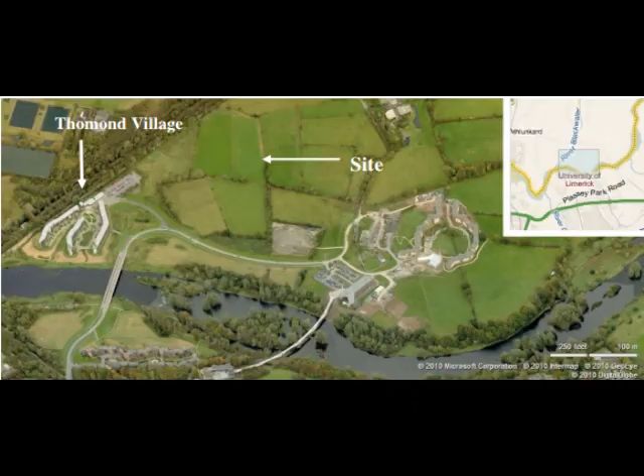Our trigger at week 2 was to design an earth berm to protect Thomond Village from flooding, or to design a detention pond berm to provide the UL campus with a sustainable greywater supply. Our group chose the first option.

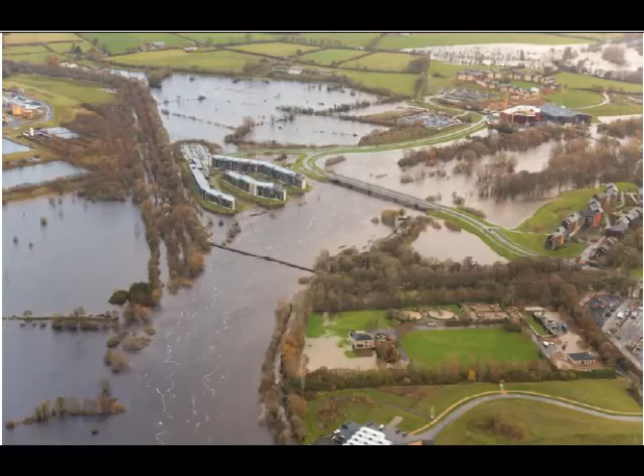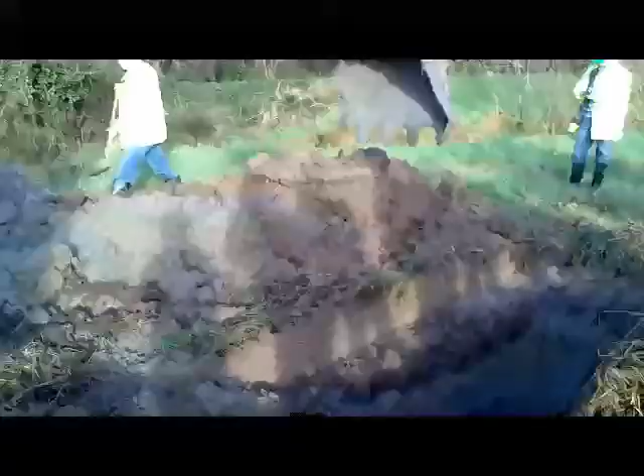From precedent studies, we know that the Thomond Student Village flooded in the year 2009. One of the first things was to conduct a site investigation, which consisted of 2 phases. Phase 1 is information gathering from available records such as maps and published documents, from studying aerial photographs, from site inspection, from company records, and from interviews and contacts.

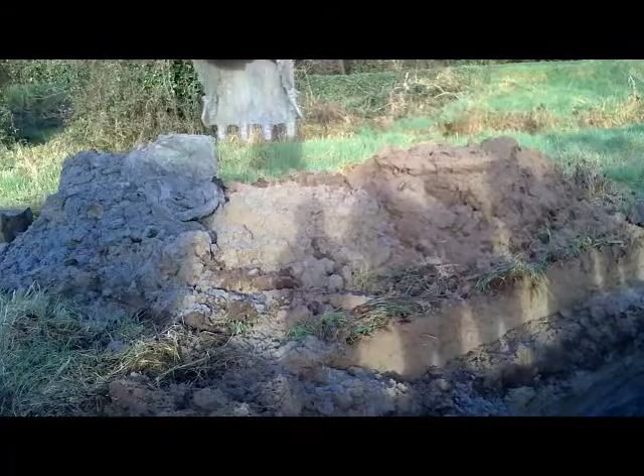Wear a safety hat. The consequence might be walking into the digger, or soil might fall as it's being lifted. Wear a high visibility jacket for visibility to avoid contact with the digger. Stand far away from the trial pit.

Never ever enter a trial pit unless the walls are reinforced due to possible collapse. Stay away from any machinery. Give plenty of clearance.

Contaminants might affect skin, therefore leading to skin irritation. This is prevented by wearing suitable gloves.

A trial pit is an excavation of ground in order to study or sample the composition and structure of the subsurface, usually dug during a site investigation, a soil survey, or a geological survey. Trial pits are dug before construction to determine the geology and the water table of that site.

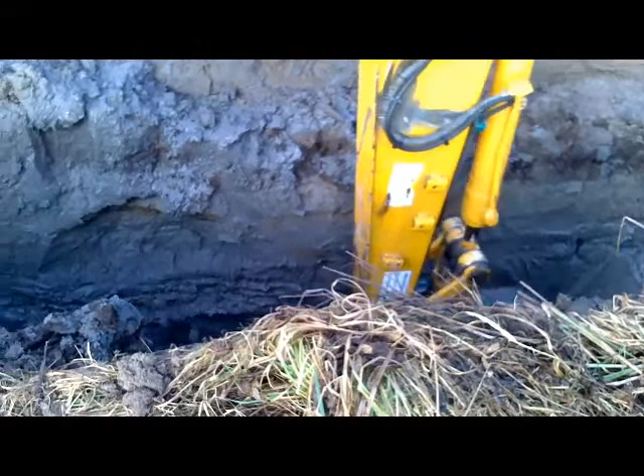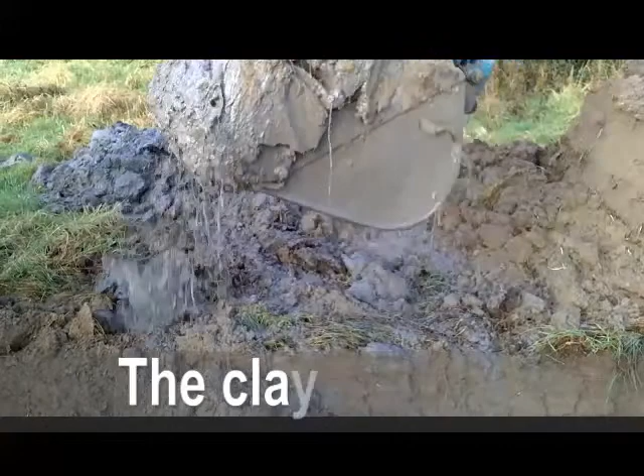Trial pits are usually between 1 and 4 meters deep and are dug either by hand or using a mechanical digger. Building and construction regulations clearly state that any trial pits deeper than 1.2 meters should be secured against structural collapse if they are to be entered by people.

We then will notice a crack occurring at the right hand side before the trial pit begins to collapse.

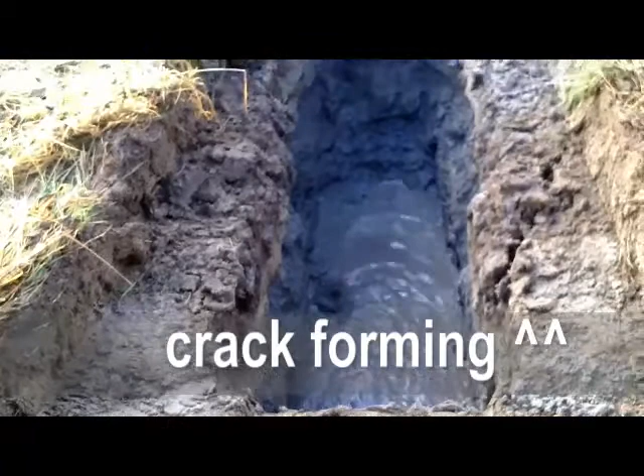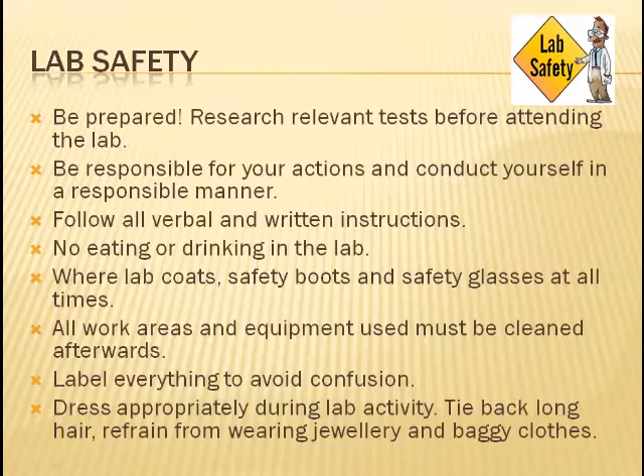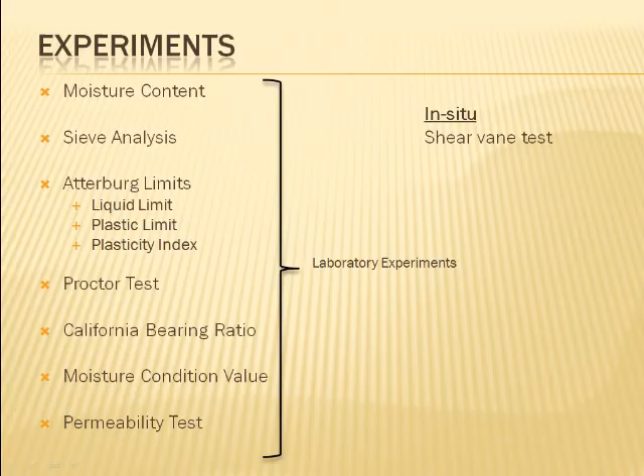Once we had collected samples of soil from our trial pits, we brought them to the soils lab. We carried out experiments on the soil to determine its properties and characteristics. The 2 main types of soil present in the trial pit were tested: a sandy soil and a clay. The following experiments were carried out: shear vane test, moisture content, sieve analysis, Atterberg limits, Proctor test, California bearing ratio, moisture condition value, and falling head permeability test.

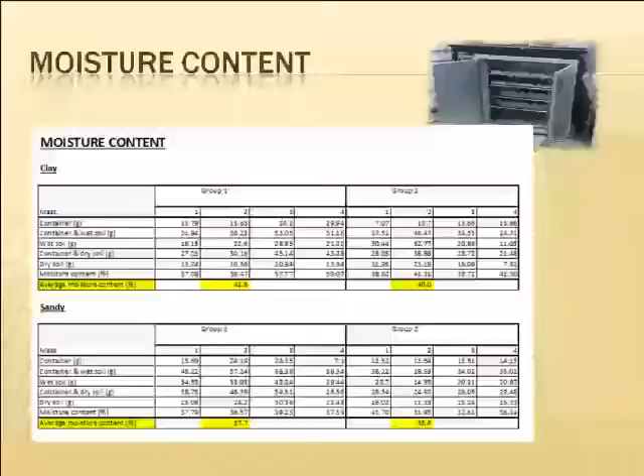The shear vane test was carried out on site to measure the shear strength of the soil, giving an indication of sensitivity. Both undisturbed and disturbed vertical shear strengths were measured and a value of 2 was calculated, indicating that the soil is sensitive. The moisture content of the sandy soil was determined to be between 36 and 38%, and that of the clay was between 40 and 43%.

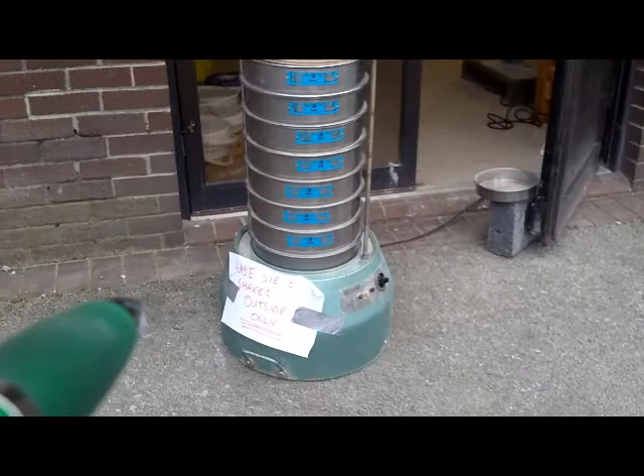Our sieve analysis results were inconclusive, as we ran into a number of difficulties when carrying out these experiments. We did, however, make an engineering judgment that the type of soil used for the following experiments was clay.

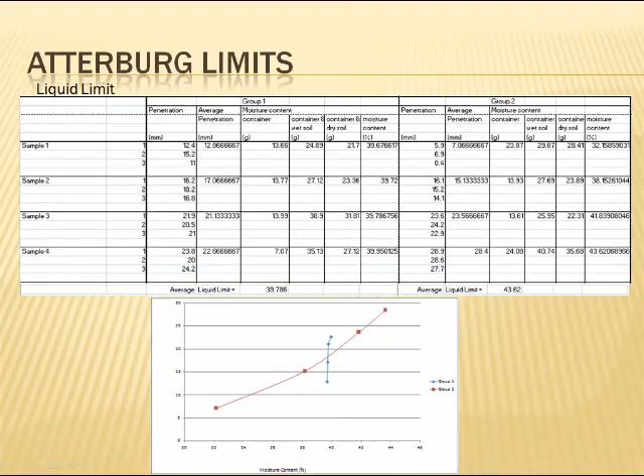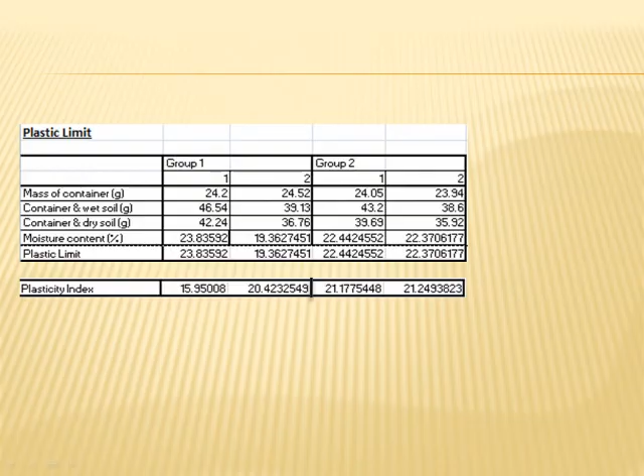The Atterberg limits are a basic measure of the nature of a fine-grained soil. Depending on the water content, the soil may appear in 4 states: solid, semi-solid, plastic, and liquid. Above the liquid limit, the soil flows like a liquid, and below the plastic limit, the soil is brittle and crumbly. The plasticity index can then be calculated from these limits, representing the range of water contents where the soil exhibits plastic properties.

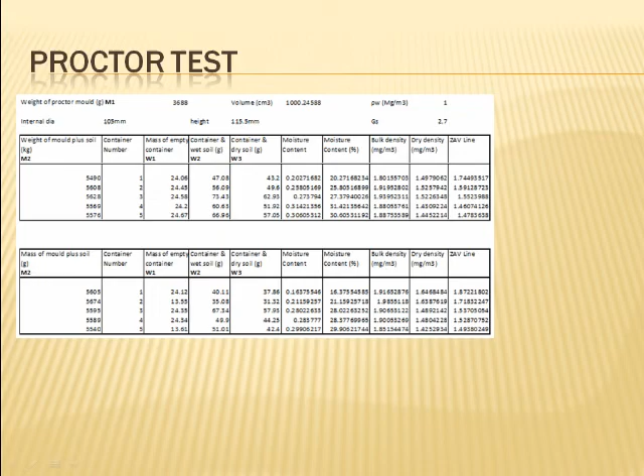The purpose of the Proctor test was to determine at what moisture content the maximum dry density can be achieved for maximum compaction. The zero air voids line was drawn to ensure our results lay below this line. A dry density of 95% will be specified for the berm to allow for a broader range of moisture contents.

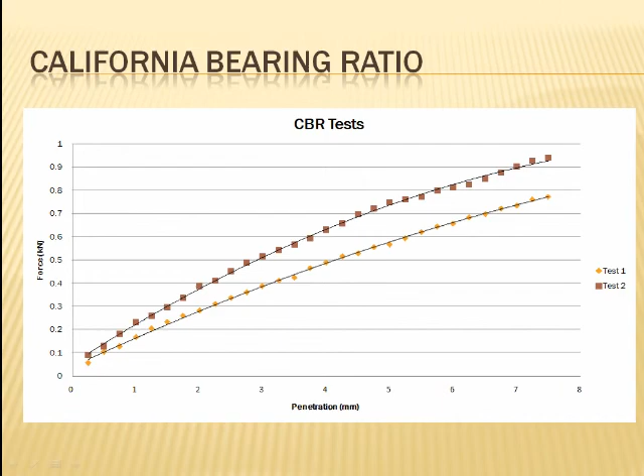The California bearing ratio was performed to calculate the bearing capacity of the soil. This is important to determine whether or not the soil can support the plant that will drive on it during construction, and the weight of the soil from the berm above it.

The moisture condition value is the compactive effort, or number of blows, required to compact a soil to its maximum density using a specific weight rammer.

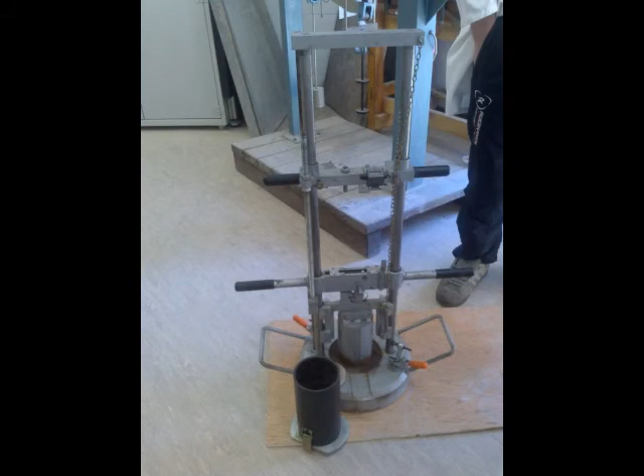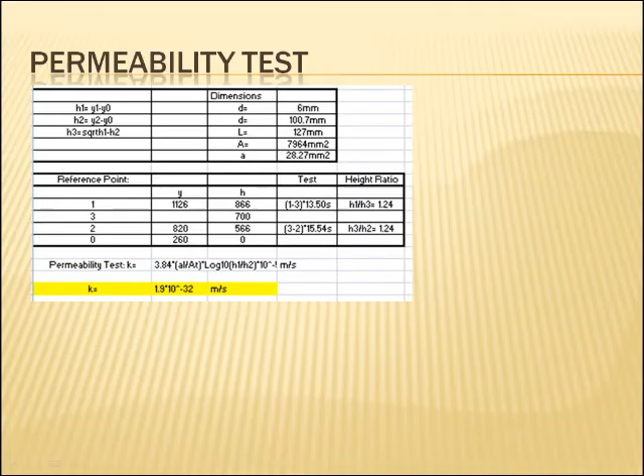The falling head permeability test measures the time it takes water to pass through a specified volume of soil, while the falling head is measured at different heights. From this, the permeability coefficient K can be calculated. This is the basis of our flow net calculations.

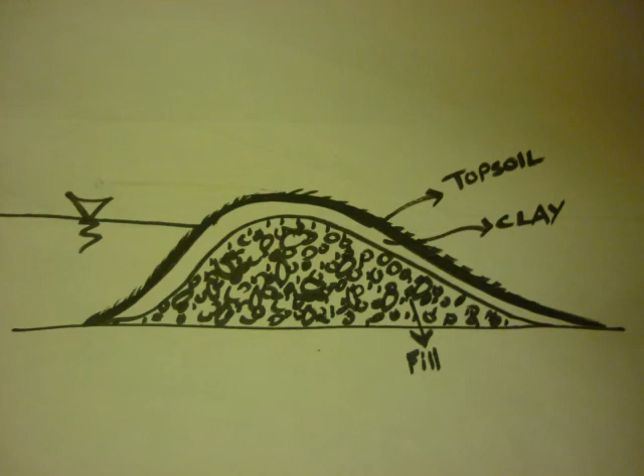Berm design. When looking at the design of a berm, there are many different variations depending on its purpose. In our initial design, we looked at a landscape type design, which we quickly realized would not work for the purpose we intended. This was because these types of earth berms, nicknamed town and garden dams, are relatively low and consist of a well-draining granular core to allow for drainage of water.

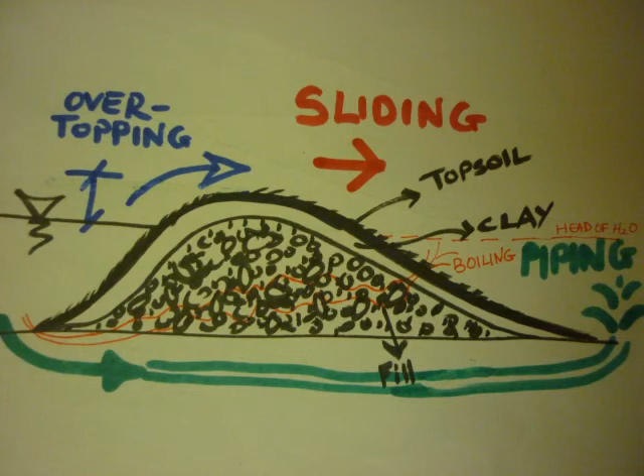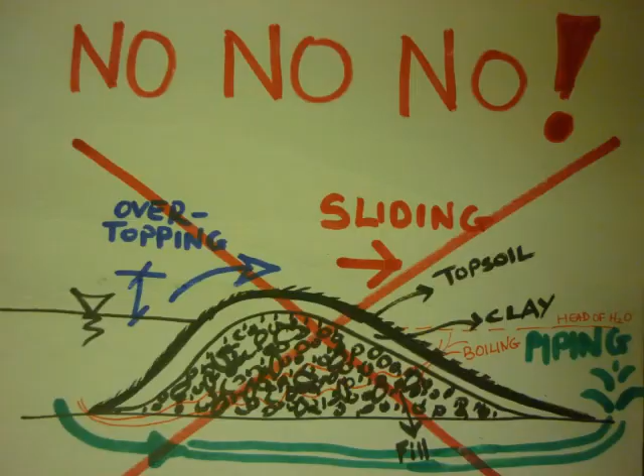This is the complete opposite of what we are trying to achieve. The purpose of our berm is to control the movement of water and protect Thomond Village from rising water levels and potential flooding. Therefore, we are trying to resist and control the infiltration of water. This led us to our next design.

This type of berm is controlled by a well-compacted, high-density clay core and steeper slopes. The core is surrounded by a semi-permeable sandy clay, which allows for the limited passage of water through the berm. In a well-constructed berm, this soil will resist slumping when wet.

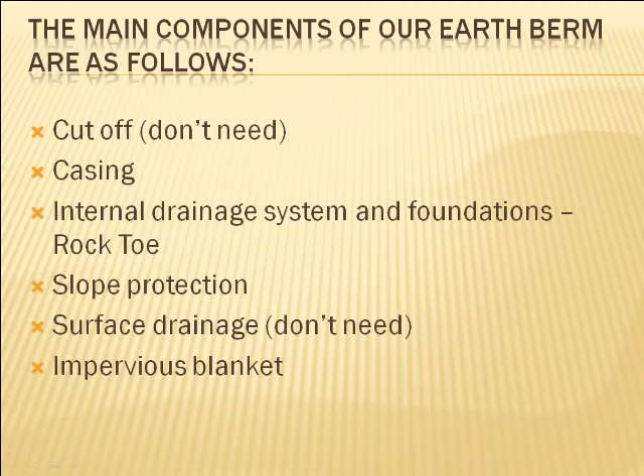We also included a downstream rock toe to handle the seepage in the berm, which could potentially weaken the structure. Its principal function is to provide drainage and also to protect the downstream slope of the berm against tailwater erosion.

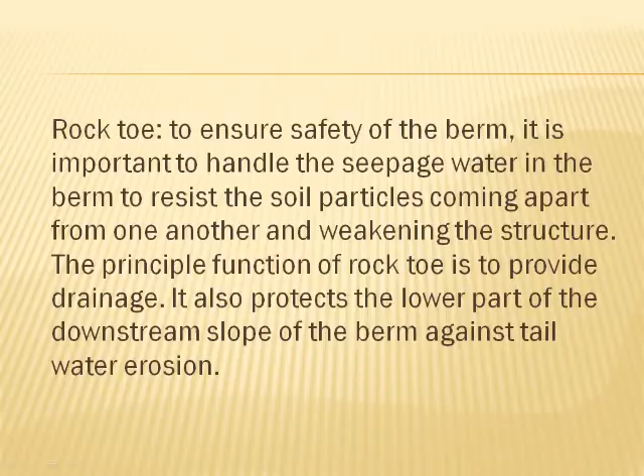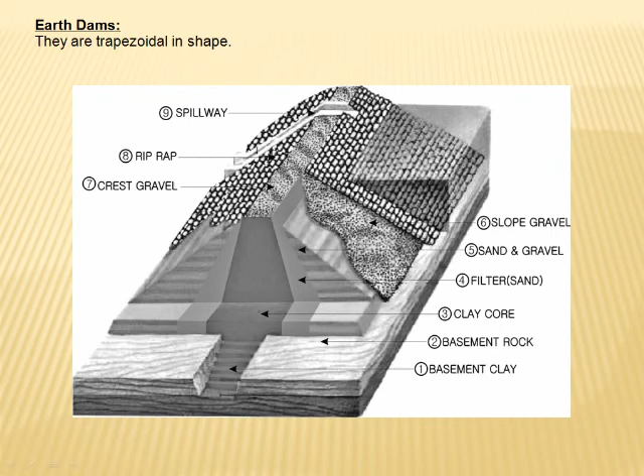After giving our design more thought and considering our options, we concluded that this type of design was far more complex than required for our purpose. In large-scale projects, the supply of available clay is limited, so it is practical to use a clay core.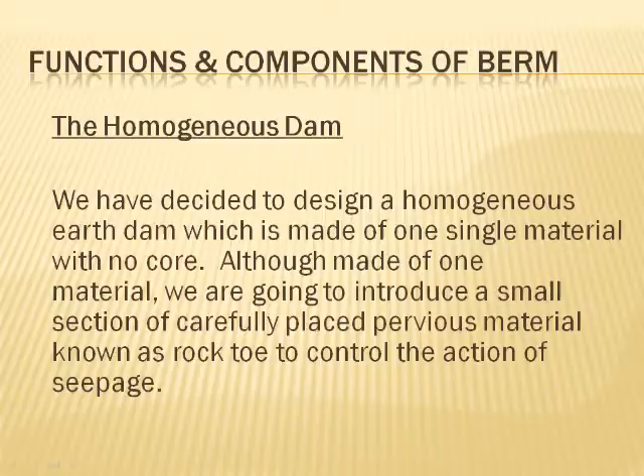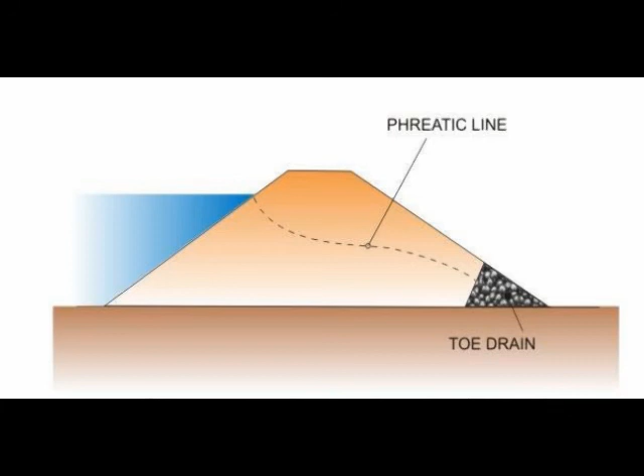Because our proposed dam is on a smaller scale, it is okay for us to use all clay in the design. This type of design is called the homogeneous dam, and this is what we used for our final design. It is made entirely of a single impervious material, high-density clay, with no core.

In addition, we introduced a small section of rock toe, a pervious material on the bottom of the downstream slope to control seepage, as well as a sand and gravel filter. To construct our dam, the upper layer of coarse-grained soil shall be removed, and the berm shall be constructed on top of the existing clay. It is then constructed by rolling or otherwise compacting layers of the selected soil in succession.

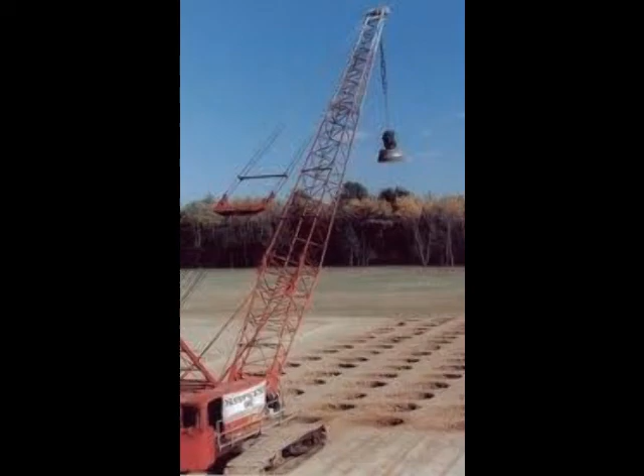Initially, the compaction process squeezes out the air, but as the height builds up, the lower layers experience an increase in pore pressure, which slowly dissipates over time.

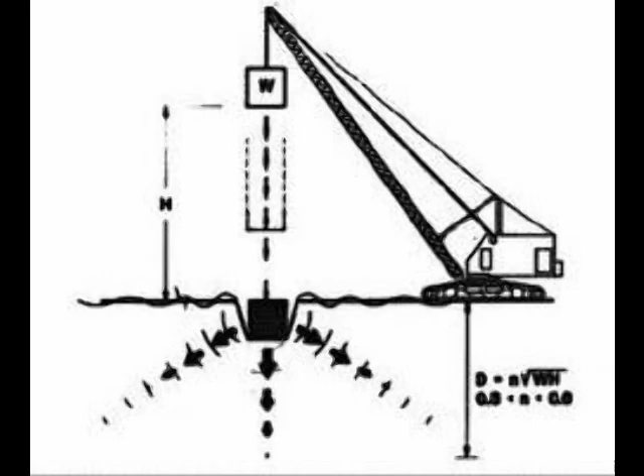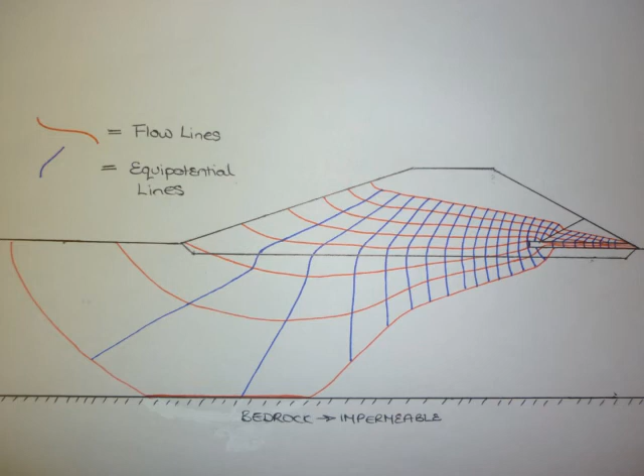Now let's look at seepage. The solution of a practical seepage problem is represented by flow lines and equipotential lines, which make up a flow net. This is done by letting a flow line equal a streamline.

The fundamental conditions to be satisfied in a flow net are that every intersection between flow lines and equipotential lines must be at right angles to each other. Therefore, the flow lines and equipotential lines form curvilinear squares throughout the flow net. It is important to remember that flow in soils is slow and assumed to be laminar.

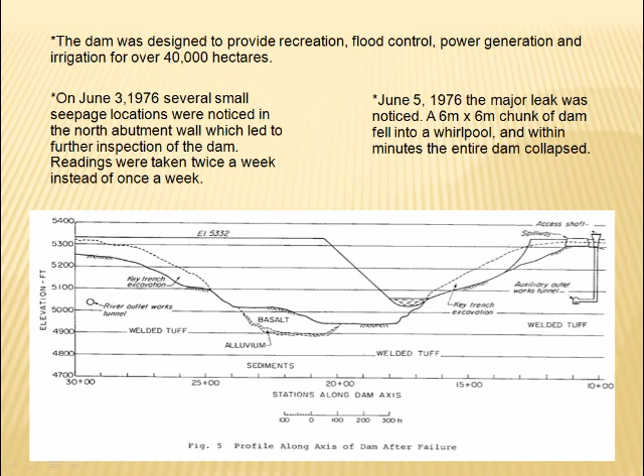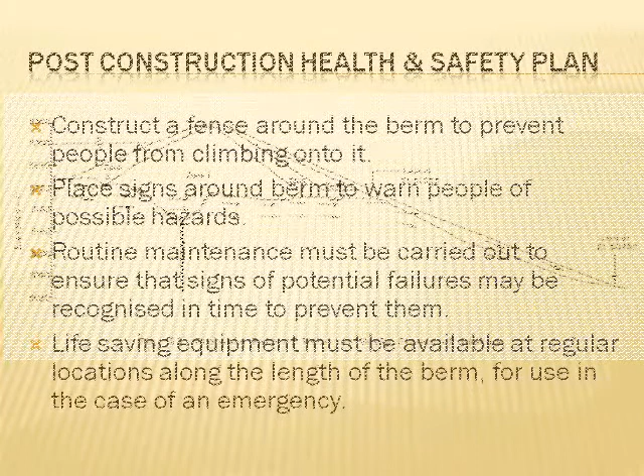Post-construction health and safety plan. Construct a fence around the berm to prevent people from climbing onto it. Place signs around the berm to warn people of possible hazards.

Routine maintenance must be carried out to ensure that signs of potential failures may be recognized in time to prevent them. Life-saving equipment must be available at regular locations along the length of the berm for use in the case of an emergency.